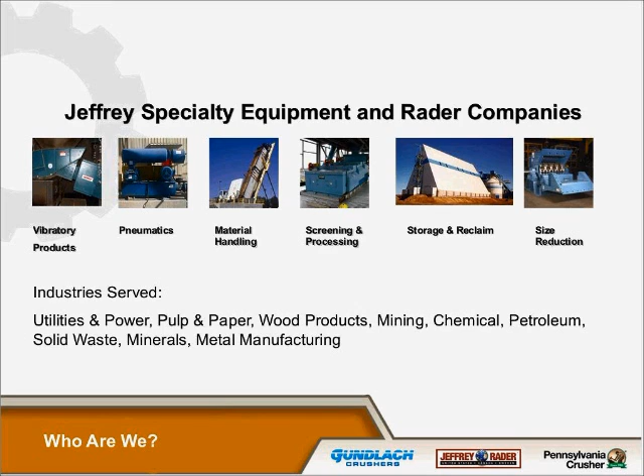Between the two companies, we have 100 years of experience in crushing and processing equipment, and with our knowledge from the engineering side of Rader, we can do much as far as the engineering side with complete system packages.

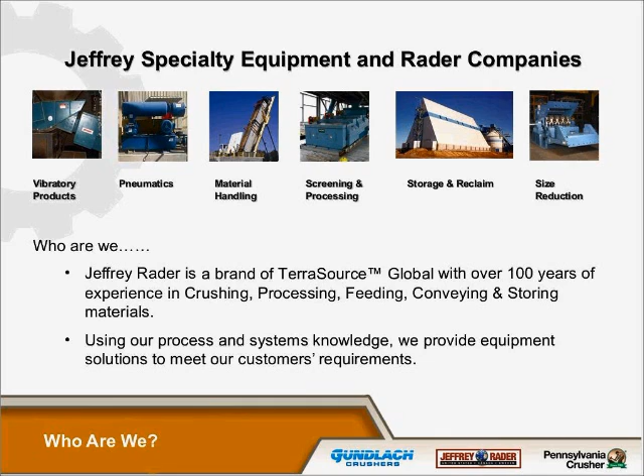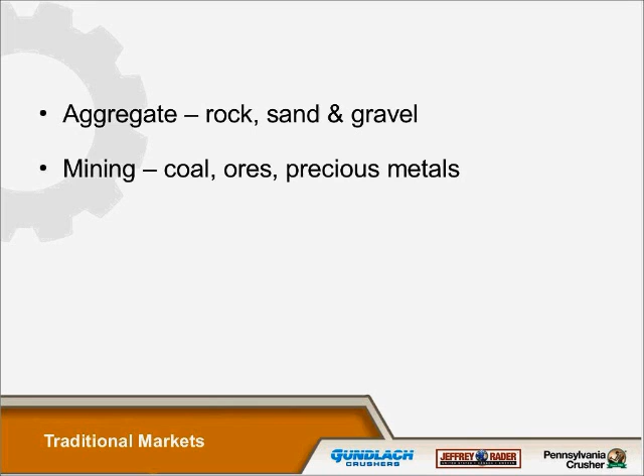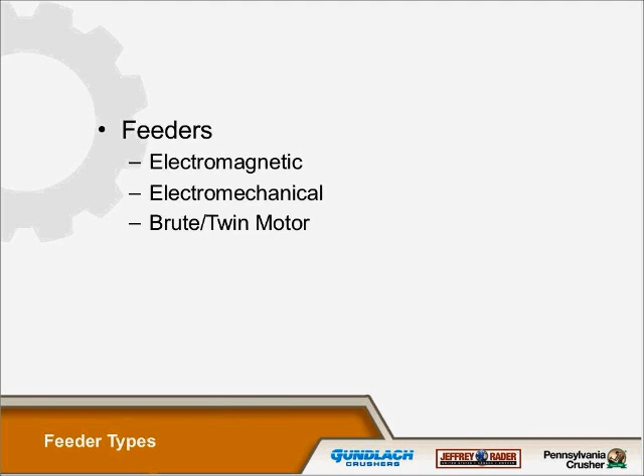Starting in the vibratory feeder sales and applications, predominantly with feeders, we are predominantly in the aggregate, which is rock and gravel, and mining of coal and ores and precious metals. Our feeders are divided into three main groups: first the electromagnetic, the electromechanical, and the brute force or twin motors. These are all unique in their own way, which we'll get into a little bit further in the presentation.

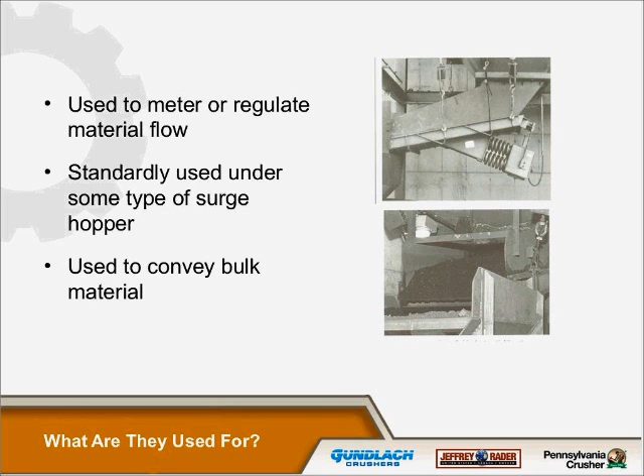Basically, a feeder is used to meter or regulate the flow of material from point A to point B, standardly used under some type of surge hopper or surge pile, and used to convey bulk materials.

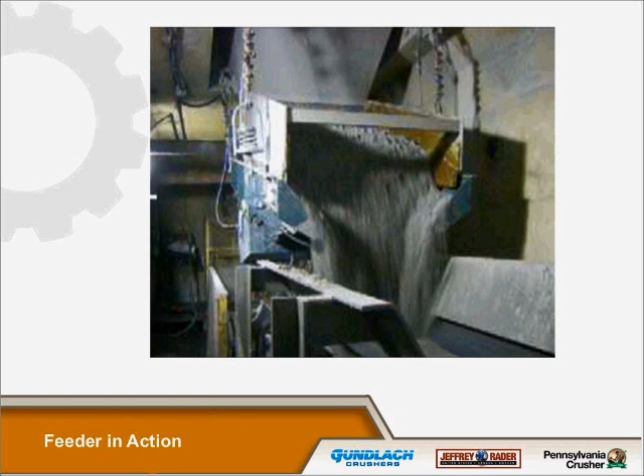You can see in this slide an electromagnetic feeder feeding a belt in line with the belt, and this particular model has a belt centering device. If you've got an application where the belt is going to be narrower than the pan feeding it, you may need to include a belt centering device so that you won't have spillage over the sides of the conveyor. You can either do this with a belt centering device or with side skirting, but in the event you wanted to use a belt centering device, it can direct the flow of material right to the center of the belt. So that's just an option we can have added to any of the pans.

This next slide here is our electromagnetic vibrating feeders. These are available in electronic versions that we can send out in emails anytime you need one, and there's a picture of a typical electromagnetic feeder there.

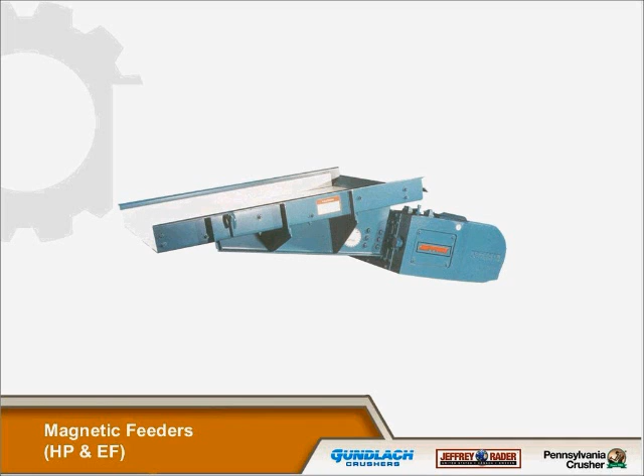With any electromagnetic or EF feeders, we can supply you a general arrangement drawing, which will show you all the dimensions: the basic vertical height, the length of the pan, the width of the pan, the suspension points, the bill of materials. If you need a drawing for any application you're working on, or an AutoCAD file for layout purposes, that can be supplied. It may be one we previously supplied, but it's for layout purposes, giving you the length, width, and vertical height for design.

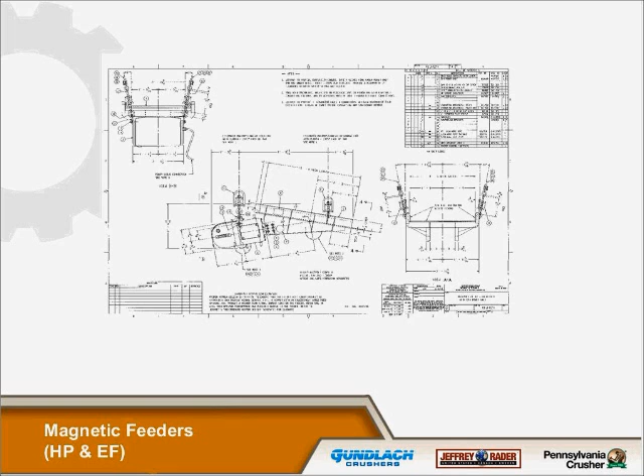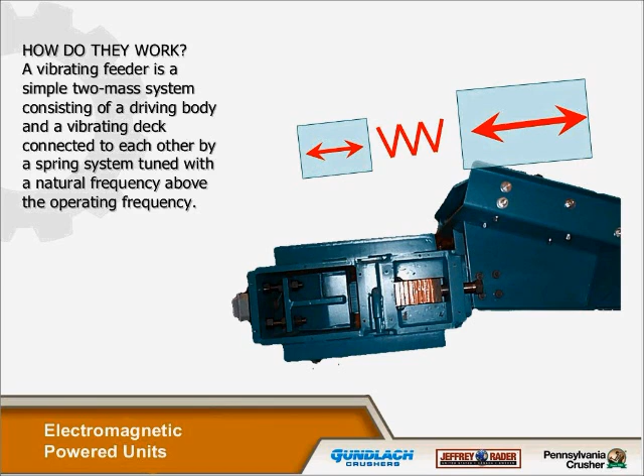How do they work? A vibrating feeder is simply a two-mass unit consisting of a driving body and a vibrating deck, where you can see in the electromagnetic power unit a center clamp, vibrator springs, and a coil. The spring system is tuned to a natural frequency above the operating frequency.

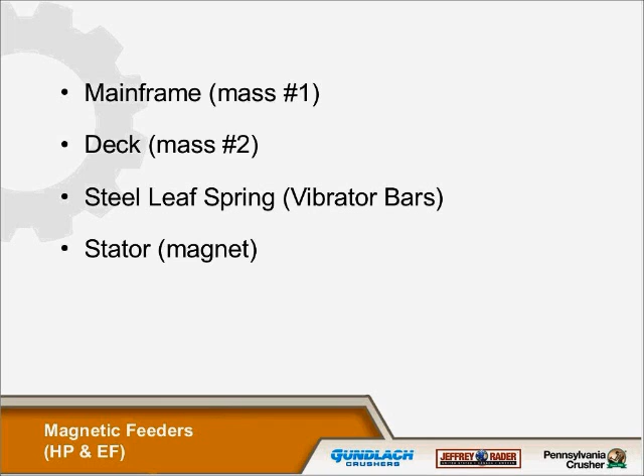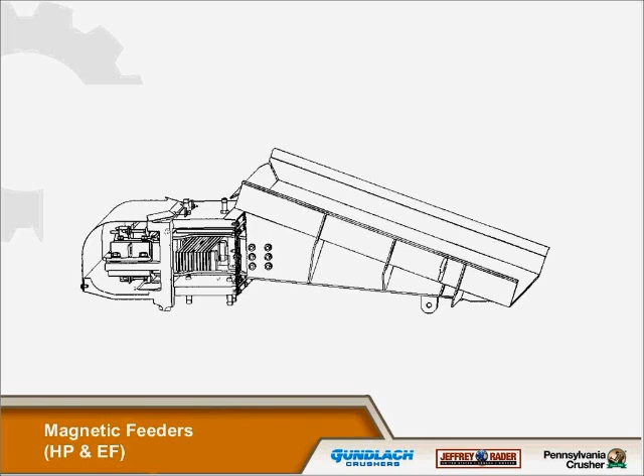Basically, you have a main frame, which is mass 1, driving the pan, mass 2, which is the deck, leaf springs, vibrator bars, and the stator, or the magnet. That's just a side view of a typical electromagnetic power unit and pan.

This is a picture of a center clamp with an armature for the electromagnetic feeders. Your vibrator bars on these would be placed in this gap here on the center clamp.

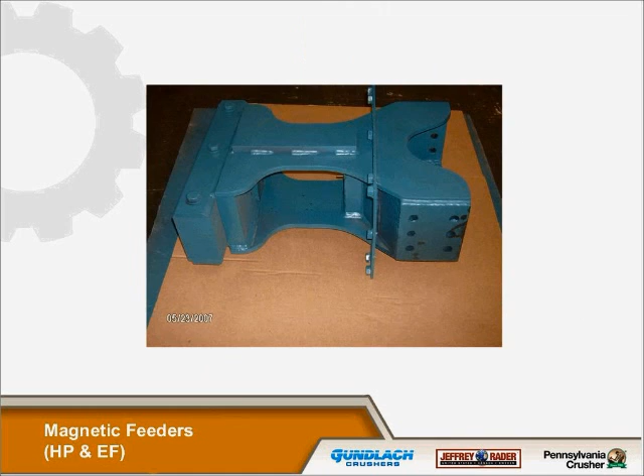The housing for the electromagnetic design, these are for the EF series. They're cast for our EF 3, 4, 5, and 6 models. The EF 8 are going to be a welded mainframe instead of a cast one.

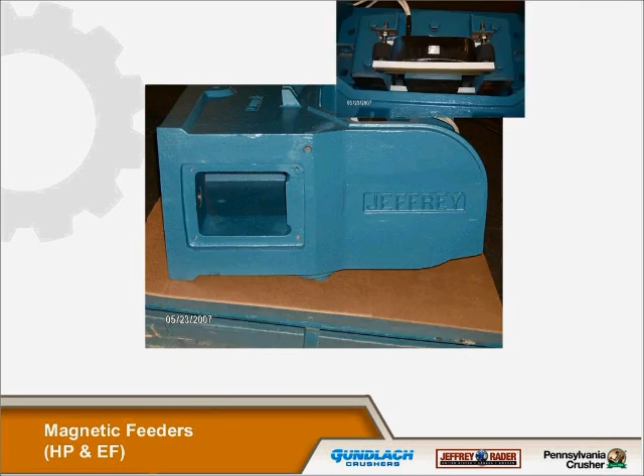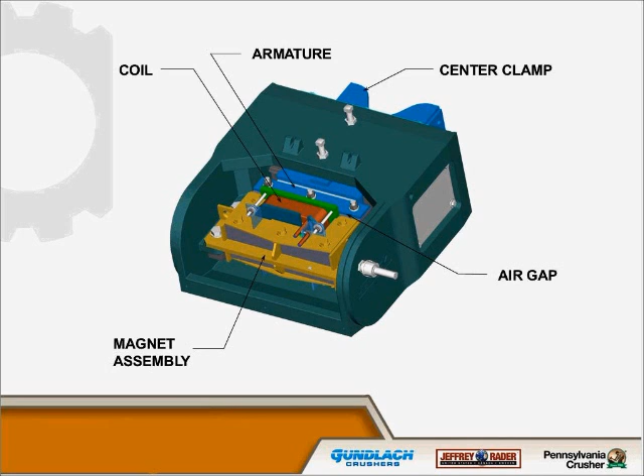This is showing a picture here of your coil and the electromagnetic assembly. Here we got it broken down where you have your magnetic assembly, the coil, the armature, your center clamp, and your air gap. That's all the internal components that make up the electromagnetic power unit.

The basics of the Jeffrey Rader brand electromagnetic feeder is controlled by high-frequency vibration, and this is accomplished through the use of electrical pulses in conjunction with a mechanically tuned machine, with mechanical resonance frequency slightly different from the electrical frequency of the power supply.

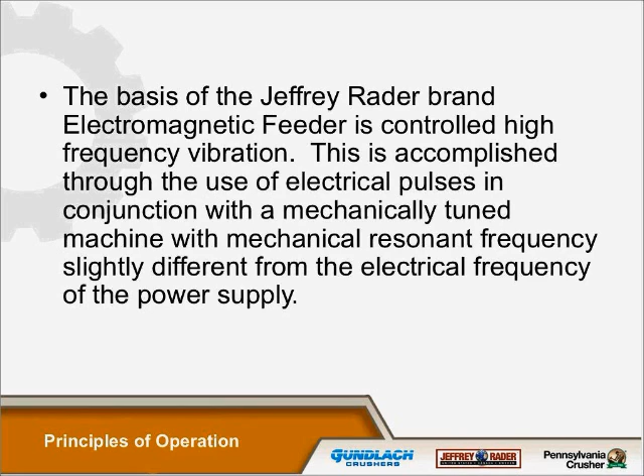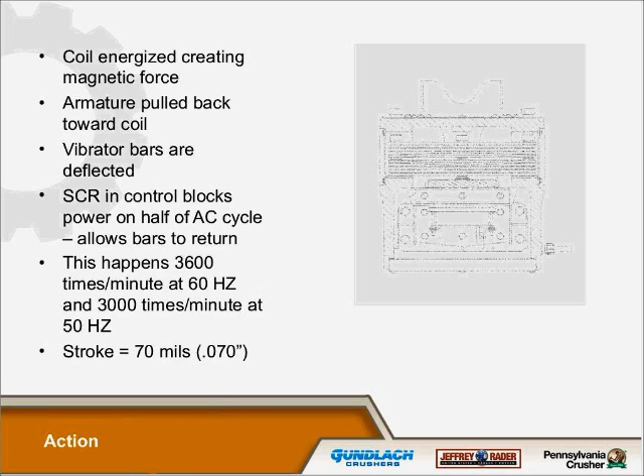Basically what's happening here, you have a coil which is energized and uses your magnetic force. When it's energized, the armature pulls back toward the coil. Vibrator bars are deflected, and you have an SCR in your control, and this SCR blocks the current to the coil, therefore releasing the bars and causing deflection, which acts as a spring to cause the vibrations. In the electromagnetics, this happens 3,600 cycles per minute for 60 hertz and 3,000 cycles per minute at 50 hertz, and these are tuned to a stroke of 70 mils.

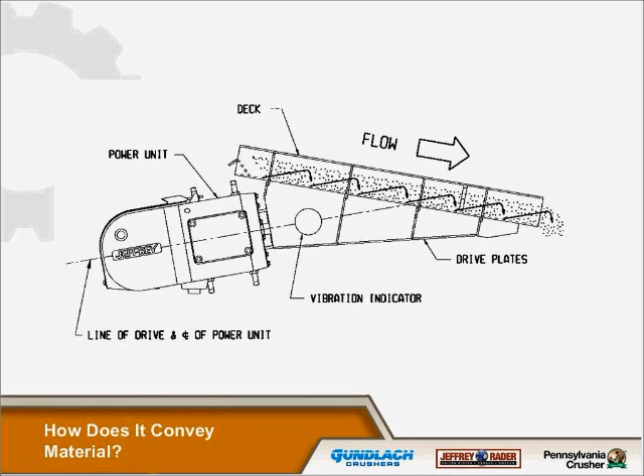This is basically showing you here the line of drive for the electromagnetic feeder, where you have your power unit and your line of drive going through the pan.

For electromagnetic units, the speed is constant, so you're basically controlling the voltage to the coil, and then you have 0 to 100% variable range in your control of the electromagnetic feeders.

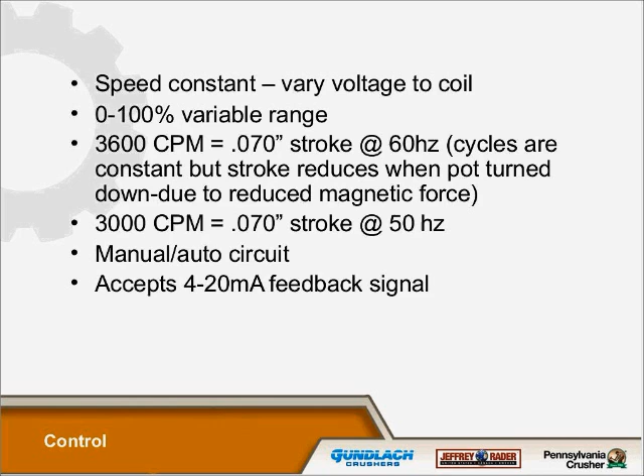As I said, 3,600 cycles per minute equals 70 mil stroke at 60 hertz, and 3,000 cycles per minute at 50 hertz. A manual auto circuit and accepts a 4 to 20 milliamp feedback signal from your PLC, so if you wanted to control it through your PLC, you do have that option with the 4-20 milliamp signal.

All the controls for the electromagnetic feeders are CSA approved. Our standard control cabinets are NEMA 12 enclosure. As a standard offering, we can offer a NEMA 4 or NEMA 4X. We can also offer for specialty applications a control that could be considered a high-low, if you need to regulate material and so forth. All you need to do is let us know, and we can figure that in when we're sizing the feeder for you.

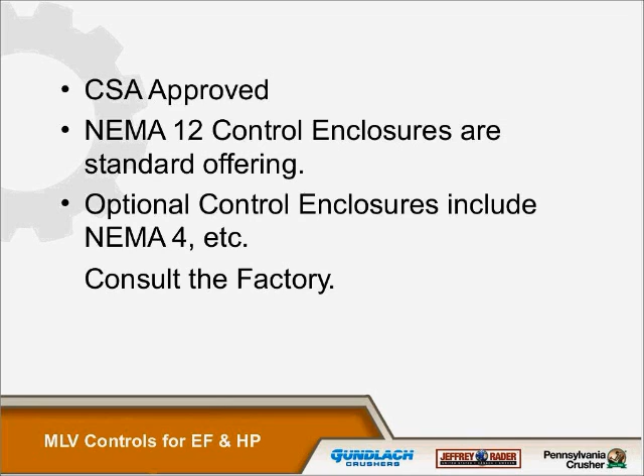One of the offers that we have, if you have an older style HP series electromagnetic feeder, we do offer a replaceable EF series with a replaceable coil. Some of the older generation HP models have an encapsulated coil, which requires you to replace the whole stator. If you go to one of the newer version power units with the replaceable coils, we'll give you a new 2-year warranty on that unit from the time of purchase. So it gives you the option in the long run of having a replaceable coil versus the encapsulated coil.

So it's less maintenance, and also it's cheaper in the long run as far as replaceable parts. That's an offer, so if you have one of the older HP series, consult us and we can give you a newer version HP or EF style replaceable coil power unit.

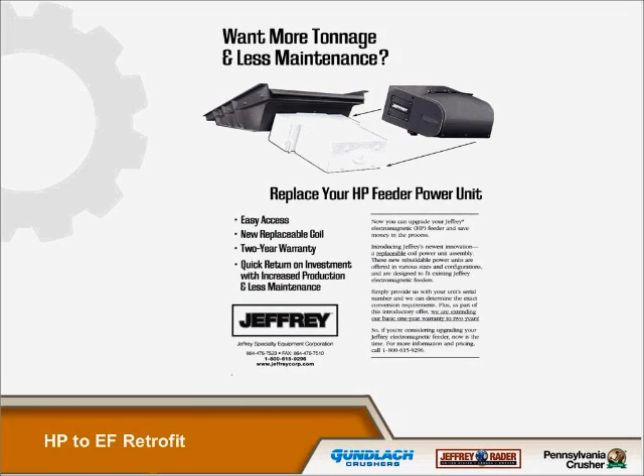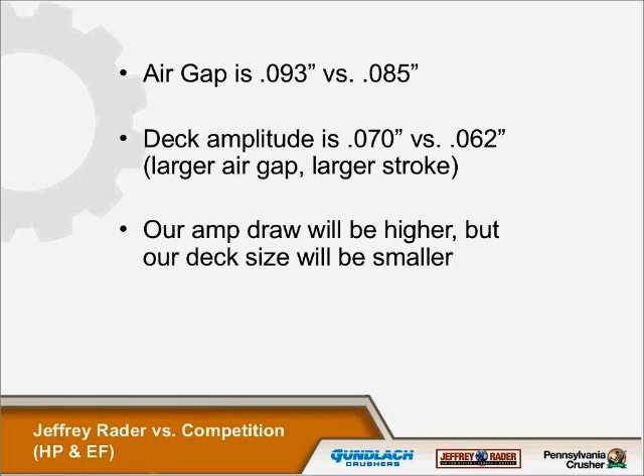As far as electromagnetic units at standard 460 volt, we stock an EF3 36 by 60 and an EF4 42 by 60. These are both complete units ready to ship out of inventory, based on aggregate applications at 100 pounds a cubic foot. These units will do approximately either 600 for the EF3 or 700 for the EF4.

So these units are standard stock units that can be shipped within a day or so, providing that the customer has the correct voltage that they need. If we have to convert it from 460 to 575, we'd probably have about a week turnaround time for those. But just keep in mind that the EF3 and EF4 are stock units.

Stock power units at 460 volts, we stock EF3, EF4, EF5, and EF6. Of course, the EF5 and 6 require larger control cabinets, but we have these power units so that if you have an existing unit and one of the power units goes out and you need a quick turnaround, we can ship these out right away.

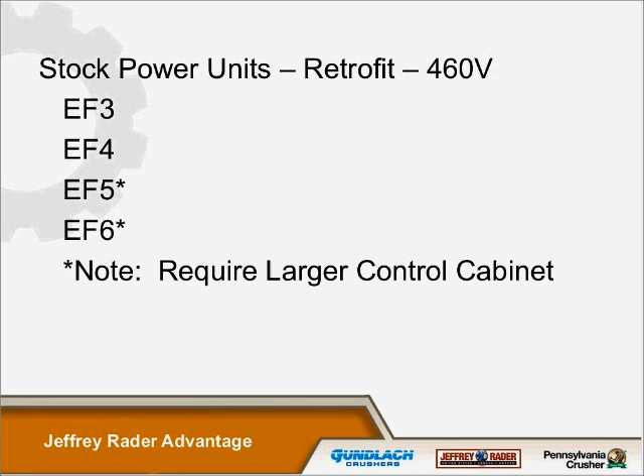As mentioned earlier, the air gap is an important issue with the performance of the feeder. Having the correct air gap will cause the unit to work at its optimal performance, whereas if you get an air gap that's not at the correct setting, it's going to cause the unit to either hammer or cause a loss of capacity.

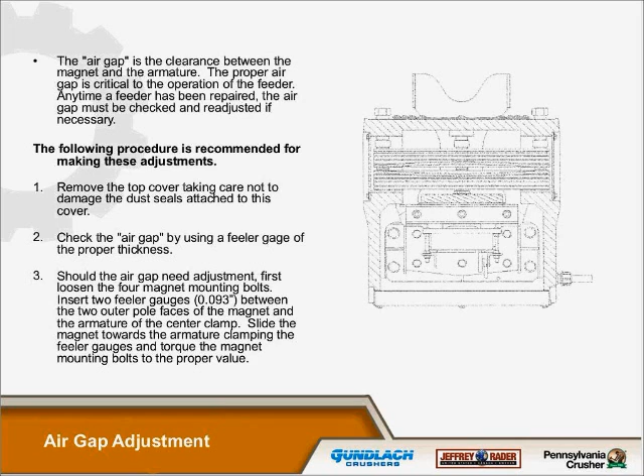Here's a picture of the inside with the cover off of an electromagnetic EF style series. What you can see here is the replaceable coil versus the encapsulated coils. If you have one of the older style generation feeders that has an encapsulated coil, we can upgrade it to one of the newer versions like this one, where the coil itself is all you have to replace when it goes out, instead of replacing the whole armature. So this is a big benefit for keeping downtime at a minimum if you can convert these over to these style units.

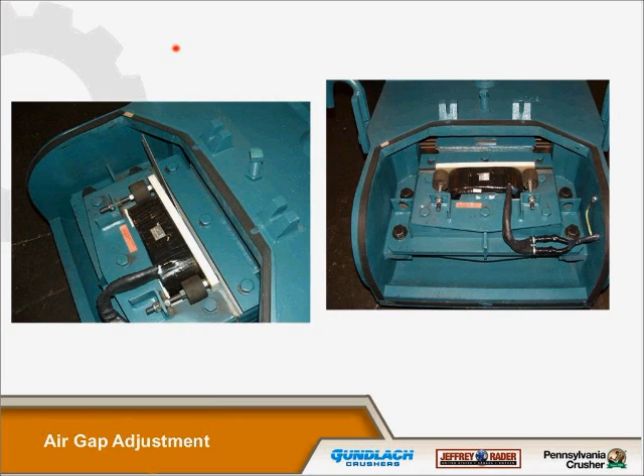Every unit will be supplied with a metal tag showing the model, serial number, year of manufacture, voltage, hertz, and phase, and so forth. These are important because if you have to do a replacement somewhere down the road, if you can just supply us with that serial number, we can go back and tell you everything about that unit as it was when it was shipped. So it's really important to make sure your tag stays intact with that unit, or keep a copy somewhere so we can track everything back to that serial number.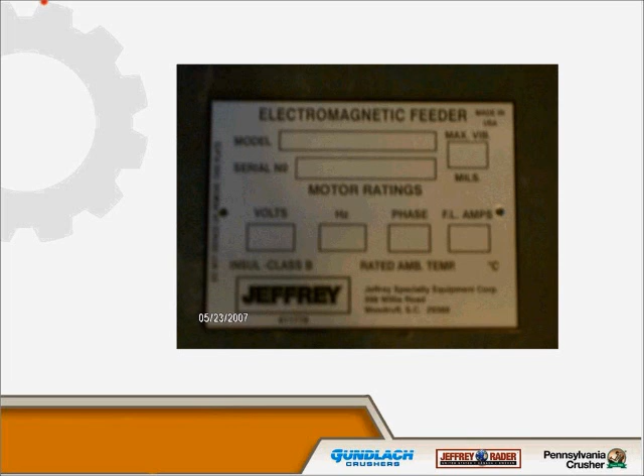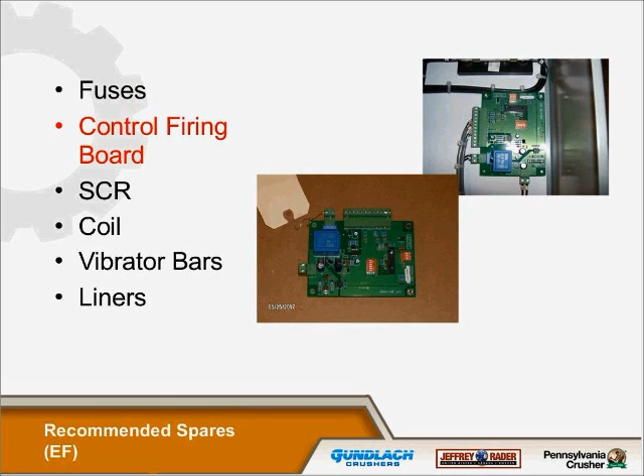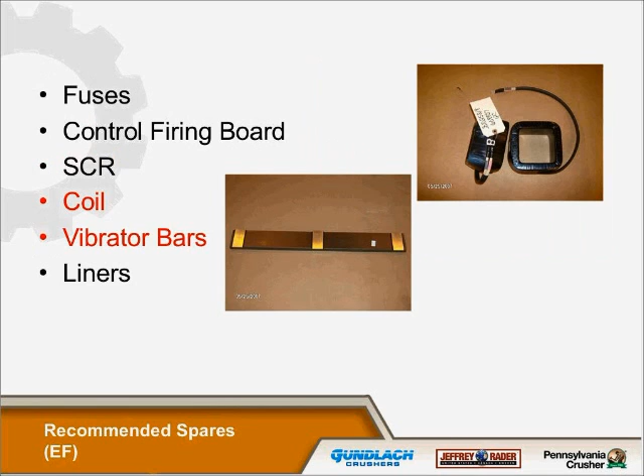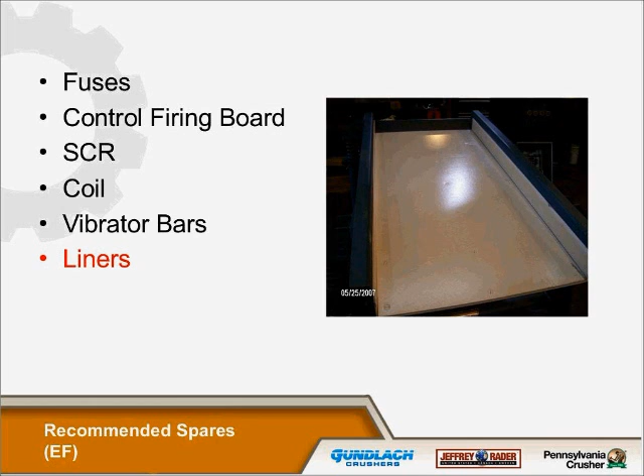Now, as far as replacements, these are some of the recommended replacements that we would suggest you keep in stock: fuses are very important, control firing board, SCR, vibrator bars, and liners. Out of all of these, probably the most important and useful to have in stock would be the fuses, the control firing board, the SCR, and the coils, because if one of these goes out, most likely the unit's going to go down. So those four items would be highly recommended to keep as stock items.

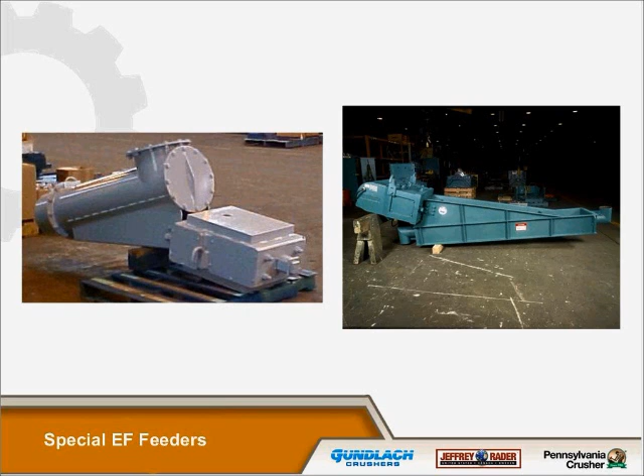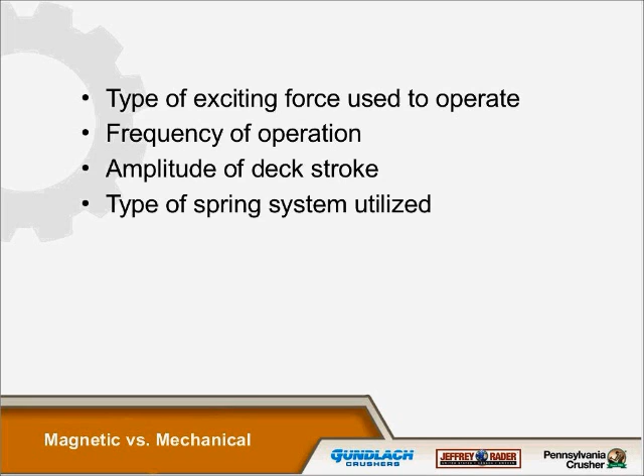Types of exciting force used to operate, frequency of operation, amplitude of deck stroke, type of spring utilized. For cost effectiveness, on electromagnetic you would consider using the smaller units, electromechanical on the larger units. On the smaller units, you want to consider our HP or an EF. When you get up to about a 42 pan size, you would probably want to look at going more towards electromechanical from a cost standpoint. Those are some of the advantages of using electromagnetic over electromechanical. Some people are more comfortable with the mechanical side versus the electrical - it could just be a matter of preference.

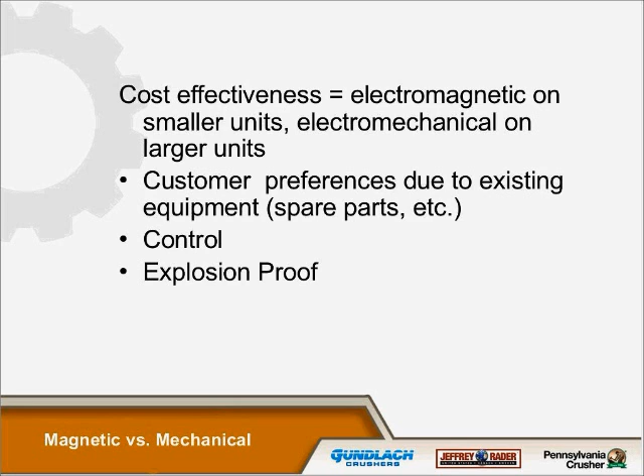Customer preferences are due to existing equipment, spare parts and things they keep for other units, the control, and explosion-proof environment. If you've got an application where you need an explosion-proof rated unit, that's going to eliminate the electromagnetics, because those are not rated for explosion-proof applications, whereas the electromechanical can be done through the use of an explosion-proof motor. So that's some of the differences you might want to consider when looking at electromagnetic or mechanical - whether it's an explosion-proof rated atmosphere, the control, you might have a little better control with electromagnetic. And then when you get into the larger deck sizes with much larger material, you want to look at electromechanical.

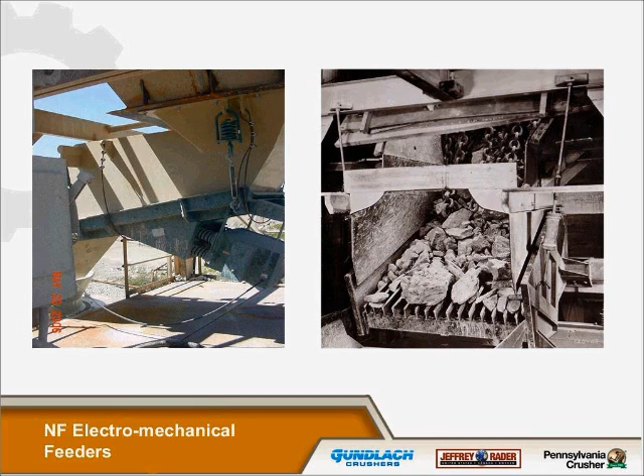A couple of pictures here of electromechanicals in use out in the field. The one to the right, if you look at the end of that deck, you can see a grizzly section that's been incorporated into the design, where if you've got an application where you need to screen off certain size material, that can be done through a grizzly bar section. So that's another option there of the uniqueness for scalping material off in an application if you need to get your undersized or oversized material out.

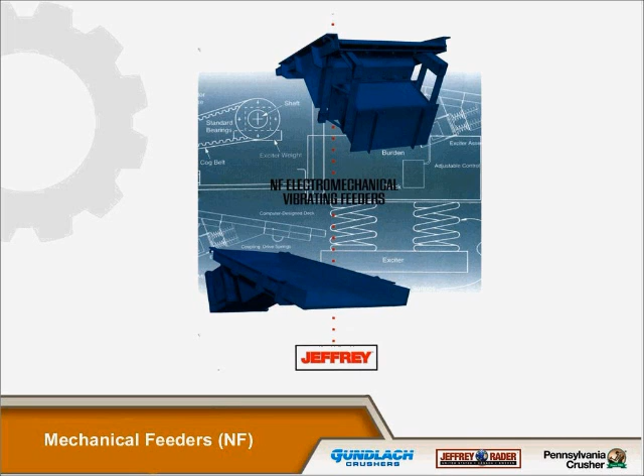Here again is another picture of our electromechanical vibrating feeder brochure, which is also available in electronic version if needed. We can send it out at any time in an email or whatever fashion you need.

On the electromechanical, the drive consists of an electric motor, a positive drive belt, and an eccentric shaft. So a little bit of differences between the mechanical and the magnetics. In the mechanicals, you have a motor, and in the magnetics, you have a coil and an armature. The motor rotates the eccentric shaft, causing reciprocating force. This force reciprocates near the natural frequency of the spring system. This causes the deck to vibrate.

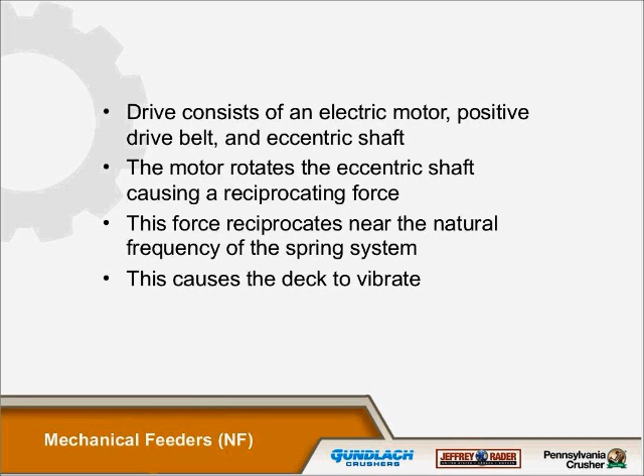In these, you have coupling springs between the exciter box and the deck, whereas in the electromagnetics, you have leaf springs in the exciter box, which act as your coupling springs do in the mechanicals. So same concept, a little different design between magnetics and mechanical as far as the type of vibration or how it's vibrated.

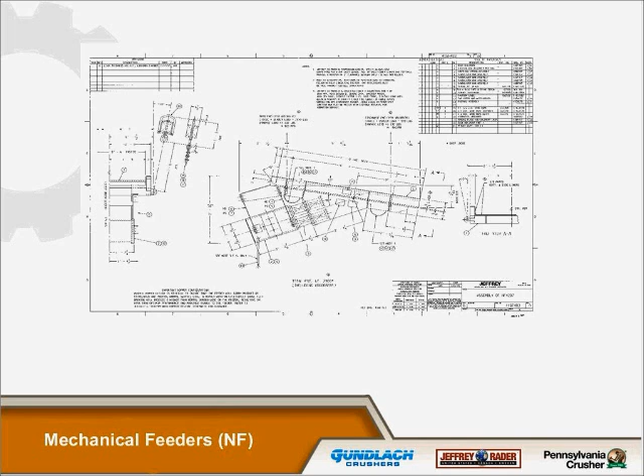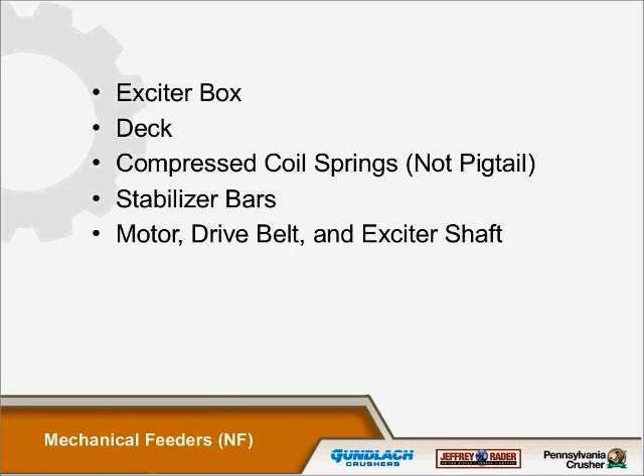With the mechanicals, of course, you have an exciter box, the deck, compressed coil springs which do not have a pigtail and are flush ground, stabilizer bars between the box and the deck, motor, drive belt, and exciter shaft. You have a shaft with eccentric weights, motor, cog, drive belt, positive no-slippage flange bearings on each end of the shaft, which can be replaced, and these are tuned at 5/16 strokes at 900 cycles per minute.

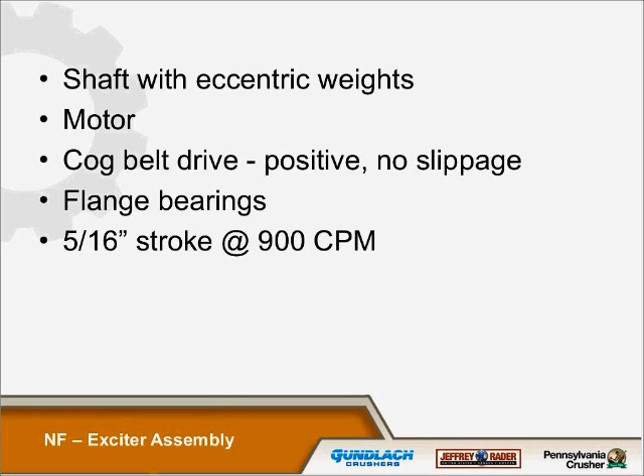The advantage of electromechanical over magnetics is that it allows you to have a bigger stroke, whereas if you've got larger materials and you need that bigger throw to move the material over the pan, you get that more so with the 5/16 stroke versus the 70 mils on the electromagnetic. So you have a bigger stroke, which is good for when you get an application with bigger pans and bigger materials. So once you get above a 36-inch wide pan, in most cases you're going to look more towards an electromechanical versus electromagnetic just because of the pan size and the stroke.

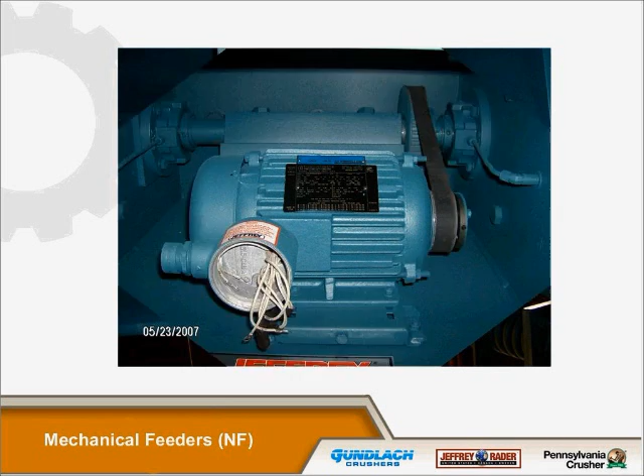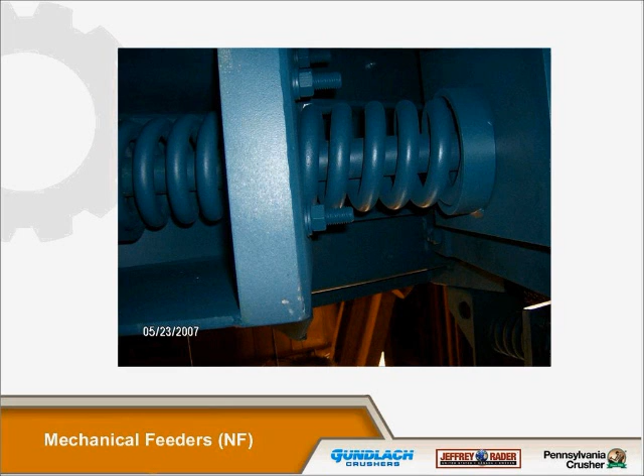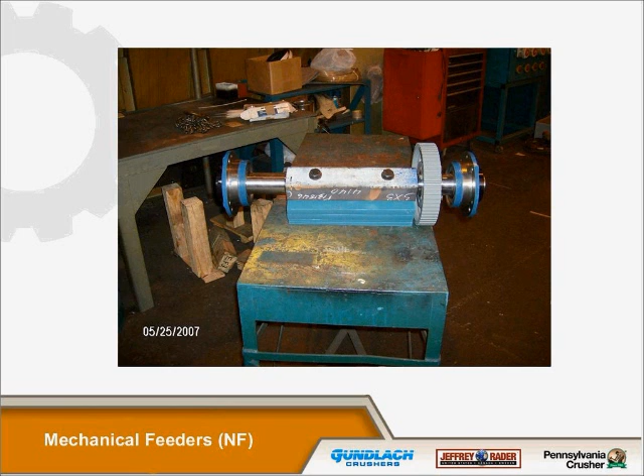This is a picture here with your coupling springs between your exciter box and your deck. So basically, when that shaft turns with the eccentric weights on it, it causes the vibration, which is transferred into these springs and then transferred to the deck itself. Here's a picture of the eccentric shaft with the weights and the flange bearings on each end that mounts into the box.

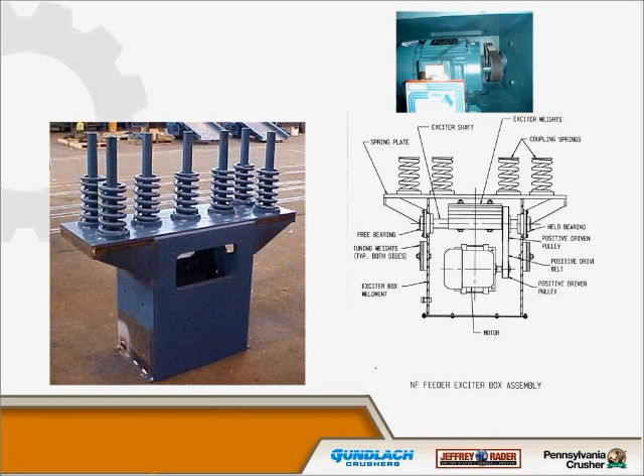There's a picture here of the exciter box prior to being mounted to the pan. As you can see here on the end, the coupling springs that would transfer the vibration from the box to the pan.

As far as the workings of the mechanical, voltage is constant, and you change the speed by altering the hertz to the motor, which is done through your VFD. So in the mechanicals, you can control the stroke by controlling the hertz to the motor. You have a 0 to 100% variable range on the control, manual-auto circuit.

Again, it accepts the 4-20 milliamp signal from your PLC. We use a Toshiba NEMA 12 VFD. Other brands can be supplied at customer request. We just need you to let us know what the specs are and what particular brand you're looking for, and we can supply other than the Toshiba.

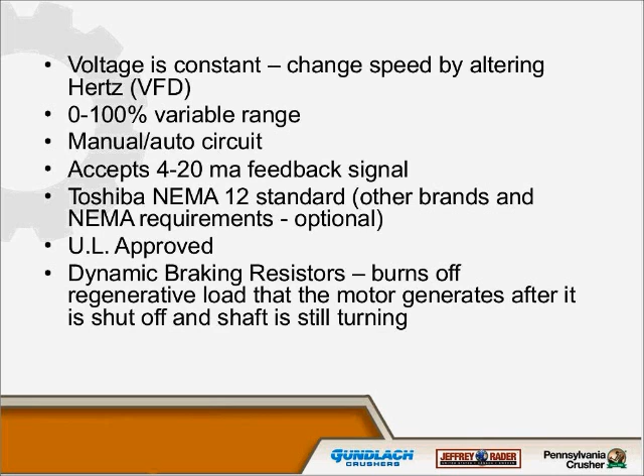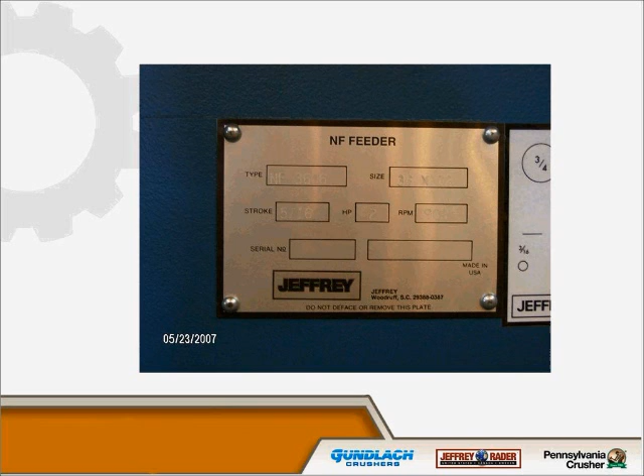All our controls are UL approved. They include dynamic braking resistors to burn off regenerative energy. Again, with electromechanicals, we also supply a metal name tag with typical information - the type, the size, the stroke, the horsepower, the RPMs, and the serial number. These are very critical in the field when you need replacement parts. If you just give us that serial number, we can tell you exactly everything about that unit, when it was shipped out.

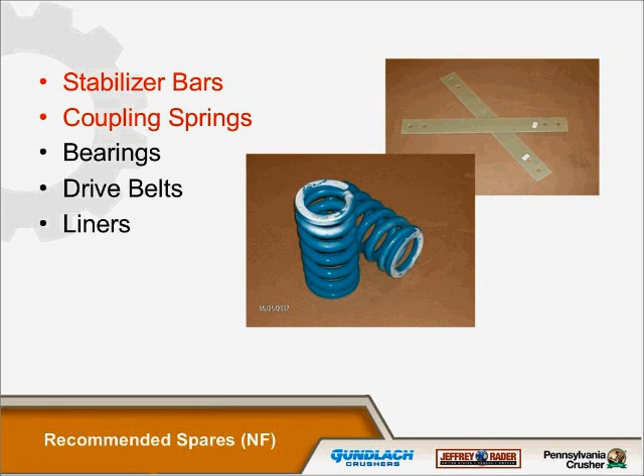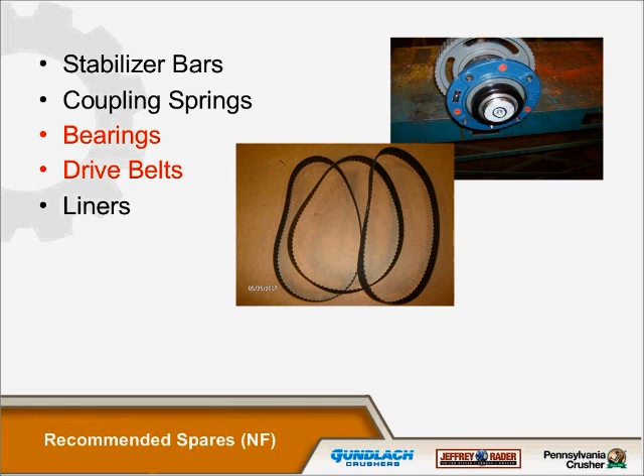Some of the spare parts recommended for the mechanical feeders are your stabilizer bars, which are mounted between your exciter box and your pan, the coupling springs, of course your bearings, your positive drive belts, and your liners.

One thing I'd like to mention real quickly about liners. Liners are very critical to the performance of the pan, keeping the pan from wearing. Also, it's very critical that whatever liner thickness the machine was shipped out with is maintained throughout the life of the machine, because these are tuned machines, tuned to the deck weight of the box.

In other words, if that unit went out of here with quarter-inch liners in it, and they lasted a year or so, and then you say, well, I'm going to go back and put thicker liners in there, I'm going to go from 1/4 to 3/8 or 1/2 - that's going to cause an issue with the tuning of the unit, and it's going to most likely cause you to lose stroke and therefore lose capacity.

So anytime you want to look at replacing liner thicknesses other than what the machine was supplied with, you need to consult engineering and let us look at it, to make sure the tuning won't need to be changed as far as the weights on your exciter shaft, because of that additional weight added to the pan. It's critical that you maintain that deck weight relationship with the box and not change or add anything to it. So anytime you want to change liners and go to a thicker style, you really need to consult us and let us look at it, to make sure it won't cause issues with the performance of the feeder itself.

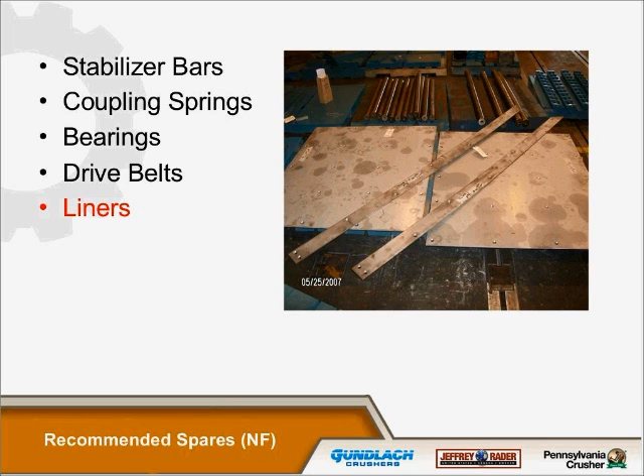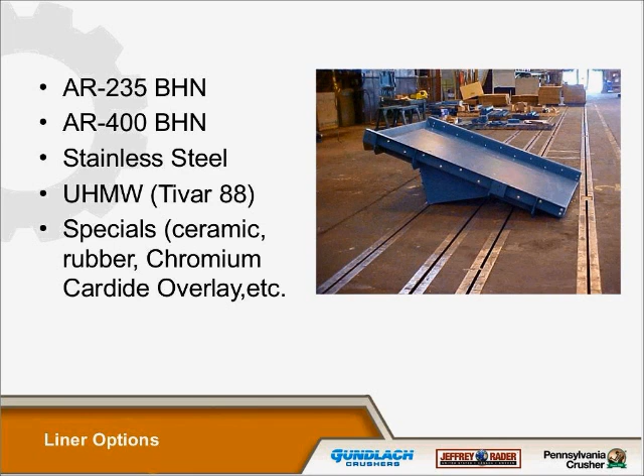You can see in this picture, as far as liners go, we offer a variety of different combinations - AR-235, AR-400, 304 stainless steel, UHMW Tivar, and specialties such as ceramic, rubber, chromium carbide overlay, and so on. Again, the main thing is that you keep the liner thicknesses constant, and if you do have to make a change or want to make a change, let us know so that we can look over the tuning of the feeder as it was shipped out.

For all models, whether mechanical or magnetic, we offer as an option cable clamps and thimbles that you can use to suspend it with. On NF, there's another option - we offer a 10-foot pigtail, which allows hookup without having to open the back of the box and wire into the wire junction box on the motor. We would supply that 10-foot pigtail, which would come out of the side of the box and can go straight to a junction box from that point without having to open the box up itself.

And we also offer a variable frequency drive, Toshiba, for the NF style feeders. That is also an option.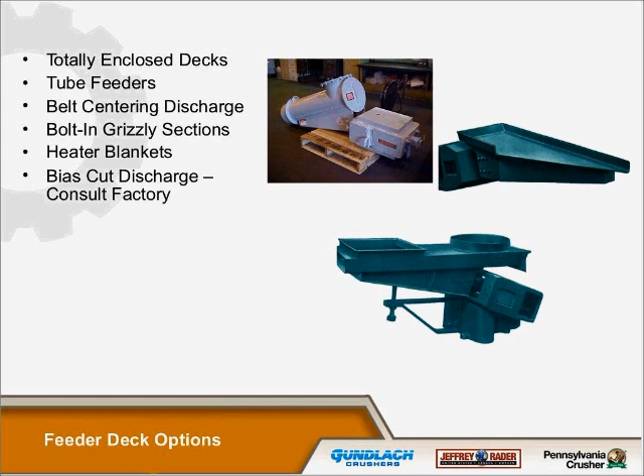Belt centering devices, grizzly sections, as mentioned earlier. Heater blankets is another option we can provide, where if you're in an environment where your pan may freeze over with material on it due to really cold, extreme temperatures, we can supply heater blankets which can eliminate the material freezing and sticking to the pan and the bias cut. Any kind of pan configuration you might have, give us a call. We can always look at doing any type of configuration, hopefully to meet the needs of your application.

One of our latest designs in the electromechanical is what we are calling a Centroload feeder, and this is a design we came up with to feed cone crushers. This one is unique in that it has a bottom discharge, cone discharge here, which helps in regulating the flow of the material right to the center of the cone.

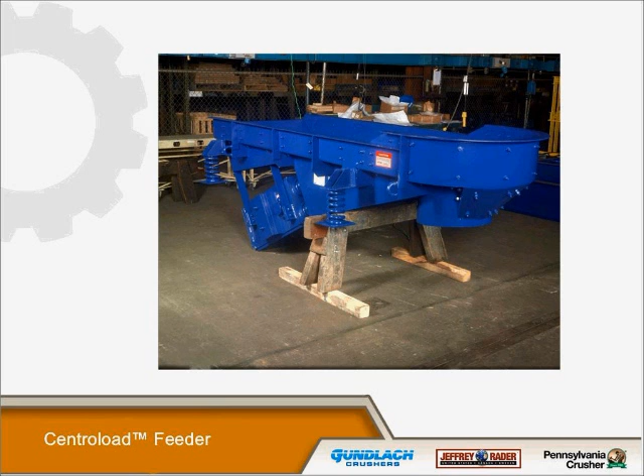One of the important issues with this design is that it's limited in width and length and also material size. When you get above any material size of 8 inches in diameter, we don't recommend using a cone style design. So for any applications where you want to consider this, you need to have material at least 8 inches or smaller in diameter.

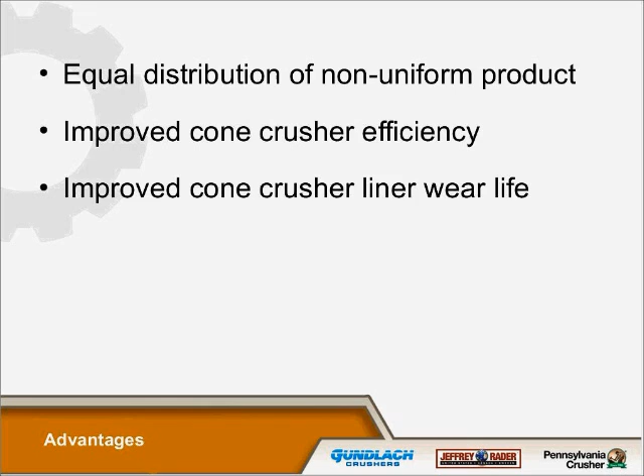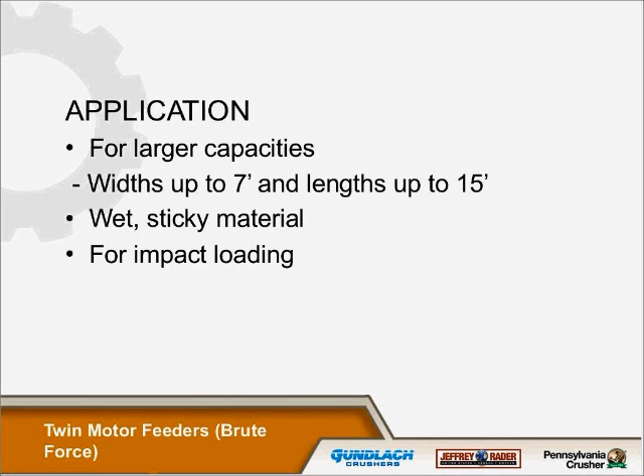As far as application goes, for larger capacities, widths up to 7 feet and lengths up to 15 feet, wet sticky materials and impact loading, we would consider what we would call our brute force feeders.

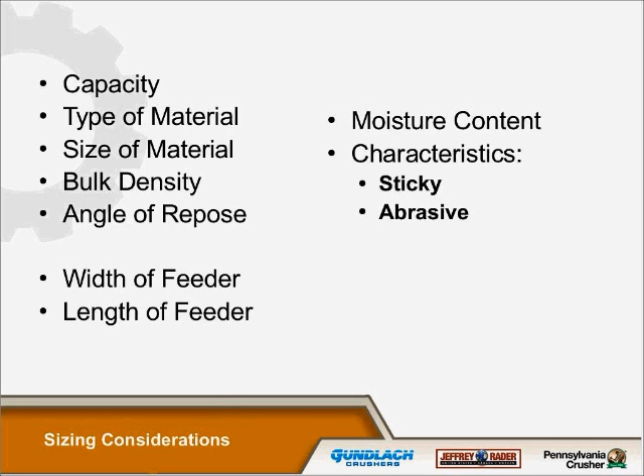Anytime you're looking at an application, we would consider capacity, the types of material, size of the material, the density of the material, the angle of repose, the moisture content, the characteristics - whether it's wet, sticky, abrasive. Determining all these are important factors in determining the width and length of the feeder, because all these in combination will determine what size feeder pan width and length is going to be required for the application.

In addition to normal applications, we'll assist you in proper hopper design, and we can't stress enough that to get optimal performance out of your feeder, following the recommended hopper design is very critical to get the capacity needed out of the feeder. As you can see here, a sub-hopper above the feeder where you have a 60-degree angle on the back slope and 50 to 55-degree angle on the front slope.

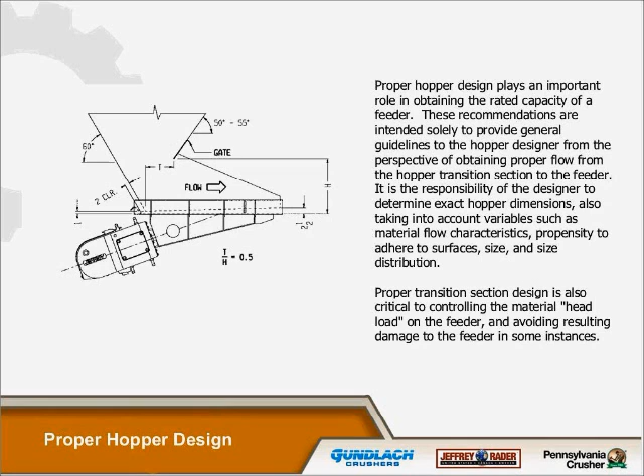These are recommended angles that we like to see to keep the load of the material more on the slopes of the sub-hopper versus the pan. It's really very important that you follow the recommendations that we provide with every feeder - following these recommended hopper designs to get the best performance out of the feeder and not damage the feeder.

As mentioned, recommended hopper configuration for efficiency and material flow from the hopper - some general rules should be followed. The rear wall should be a slope of 60 degrees and the front wall 50 to 55. Again, that's to help eliminate head load on the pan itself and overburdening the pan.

As far as gate height, it should be twice the largest piece size of that material with the normal size distribution. You need your gate height at least 2 times or more. If not - say you had material size 8 inches and you only had your gate set at 6 - if you had 2 pieces of 8-inch material coming through that throat or gate at one time, they could wedge and bind in the hopper there and have to be cleared out.

As far as the hopper throat dimension, it should be approximately half the gate height. If the throat dimension is increased dramatically, it ends up causing a burden or head load on the pan, which will restrict vibration and cause the feeder to lose capacity, and could even cause damage to the feeder itself.

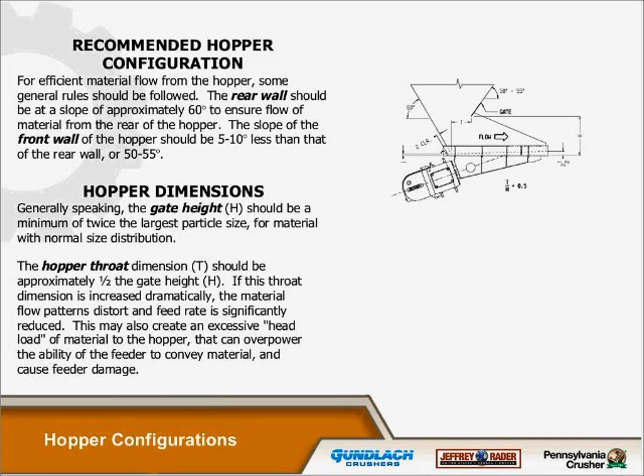You don't want anything that's going to rub the pan or cause interference, because any interference or touching of the pan is going to cause the feeder to lose vibration by restricting the vibrations of the pan through the side skirts, whether it be through rubbing on the sides or the bottom of the side skirts.

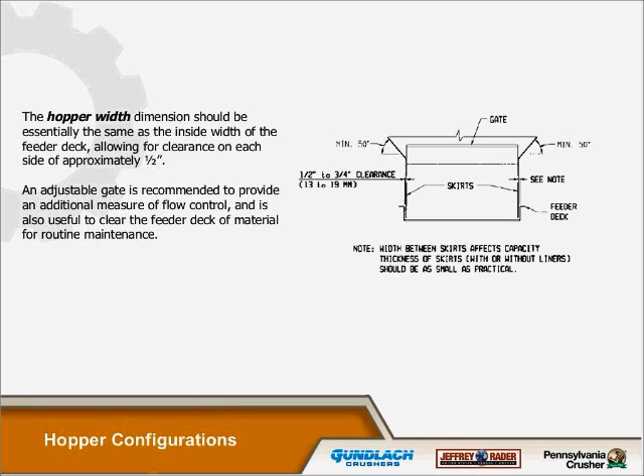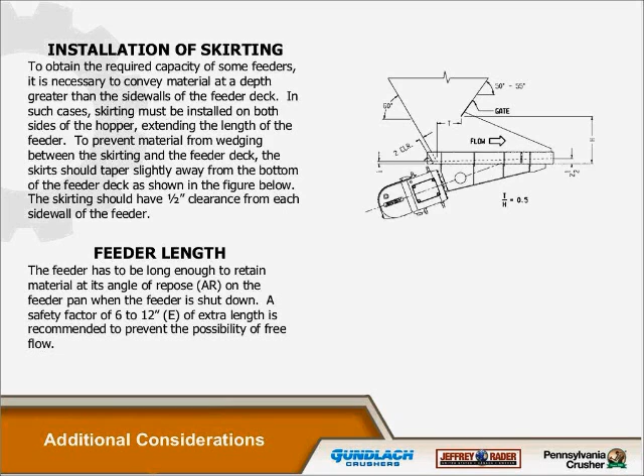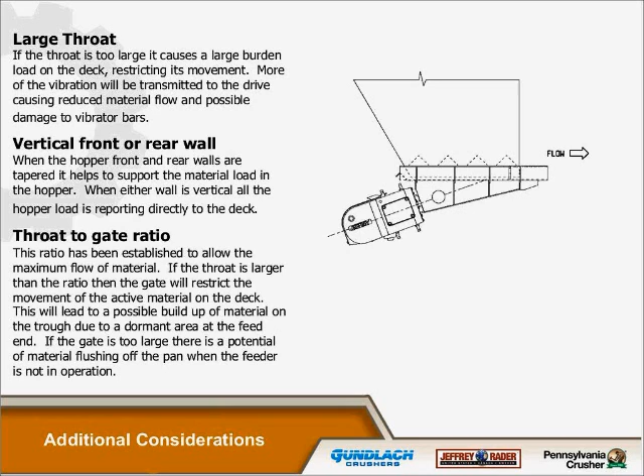The vertical front or rear walls—when the hopper front and rear walls are tapered, it helps support the material load. When either wall is vertical, all the hopper load is reported directly to the deck. So you want to make sure you have proper angles on both the rear walls and the front walls of the hopper to eliminate any direct column loading onto the pan itself, and keep your gate height set properly so you don't have any bridging in the throat or the gate of the hopper.

With every proposal that we send out, we will provide a recommended hopper design, based on your application information supplied—the pan width and length, the desired capacity, the density of the material, the size of the material, and the angle of repose. We'll supply a recommended hopper design showing the gate height material needs to be, the throat, the angle of repose, the angle of the downslope of the pan, and the E at the end of the pan, which is the dimension after the material reaches the natural angle of repose, indicating how many inches of free space is left on the end of that pan.

So we will provide with every proposal a recommended hopper design. We'll give you these details, which are critical in providing the optimal performance of the feeder itself.